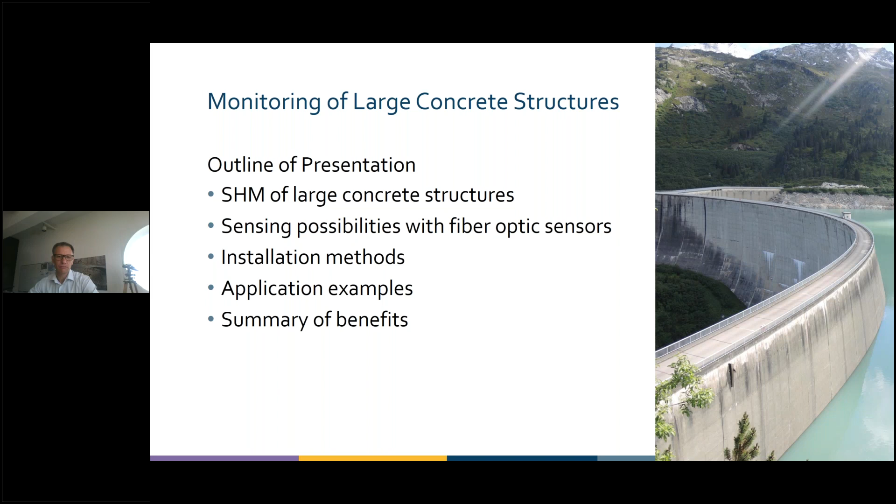So we're going to take a look at sensing possibilities. We're also going to take a look at how you actually install or embed a fiber into a concrete structure, or how you apply a fiber to an existing concrete structure on the surface. We have prepared some application examples for you where you can see the real-world performance of distributed fiber optic sensing for concrete structures. And finally, we're going to take a look at the overall benefits that fiber optic sensing can bring in the monitoring of large concrete structures.

When we take a look first on SHM, structural health monitoring of large concrete structures, this can have various reasons, and this can also stretch over the whole lifetime of a structure. SHM can already start at the design phase of the structure, where you may want to use monitoring to see if your design assumptions are appropriate.

So let's assume you have a high-rise building that needs solid foundations. One question could be, is the design length of your foundation piles appropriate? If the piles are too long, you just wasted money. If the piles are too short, you may not provide stable foundation for your structure.

As soon as the construction starts, SHM can be beneficial to assess the quality of the construction process. So for instance, was the jet grouting procedure performed correctly, or were there some issues with the quality?

However, SHM is not just a passive process. Monitoring data can be directly used to adapt the construction process. Due to the measured deformations, you can change the excavation length in tunnel construction, or you can also control the tensioning step in pre-tensioning of concrete decks.

When the structure is already there, monitoring is useful to detect structural deterioration at an early stage. And here the goal is really to detect it at an early stage, because maintenance work and repair is usually much cheaper at an early stage of a problem than later on.

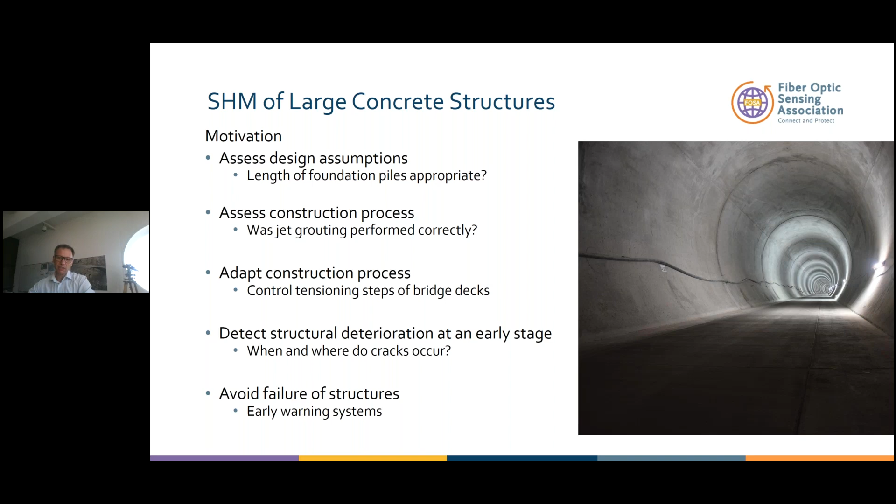First of all, these structures usually have a very long design lifetime, so we're talking about 100 years plus. So everything that you install for monitoring should also work 100 years plus. And can you actually guarantee that?

Secondly, interesting with monitoring of concrete structures is that we do have some areas where we already know problems may occur - usually bearings or joints. However, we also have defects that can occur at any location along the structure. So this means we have on one side focus areas, but on the other side, we also have to monitor the complete structure.

The third topic is that we are currently building exciting new structures that have to be monitored. However, we must not forget about our existing infrastructure. Especially with concrete structures in Central Europe, we have major issues with aging bridges, aging water dams, and aging tunnels. So we need monitoring solutions that can also be applied to existing structures.

And finally, we have harsh environment, and this is also two-folded. On one hand, our structures are usually placed at a remote location within a harsh environment, so all the sensors have to work in that harsh environment. On the other hand, the construction process itself may be harsh, so the sensors also have to be robust enough in order to survive any installation work.

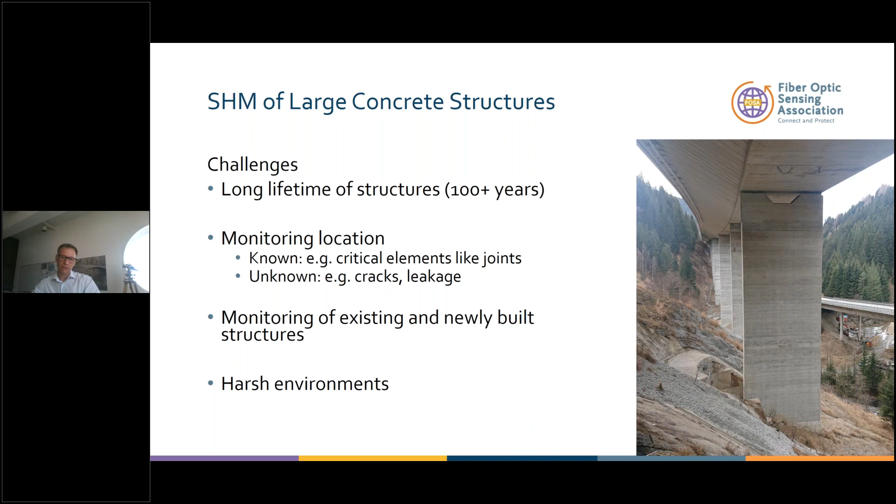Now we're going to take a look on how we can deal with these challenges with distributed fiber optic sensing. I'm pretty sure many of the attendees know about fiber optic sensing, so just a short recap - what is different compared to telecommunication?

In telecommunication, the goal is to transmit data from one end to another end, so basically on one side we have a transmitter, on the other side is the receiver. In sensing, we're actually working with the backscattered signal. And when we're talking about distributed fiber optic sensing, we have a sensing line without any gaps, so we get at any location information of the current status of the fiber.

Depending on the technology being used, it could be a chain of thousands of strain sensors - distributed strain sensing, DSS - thousands of temperature sensors - distributed temperature sensing, DTS - or acoustic sensing, DAS.

One important aspect is we're working with glass fibers, so the core of the fibers is in many cases exactly the same in sensing as it is in telecommunication. However, when we talk about strain sensing, we usually need a different cable.

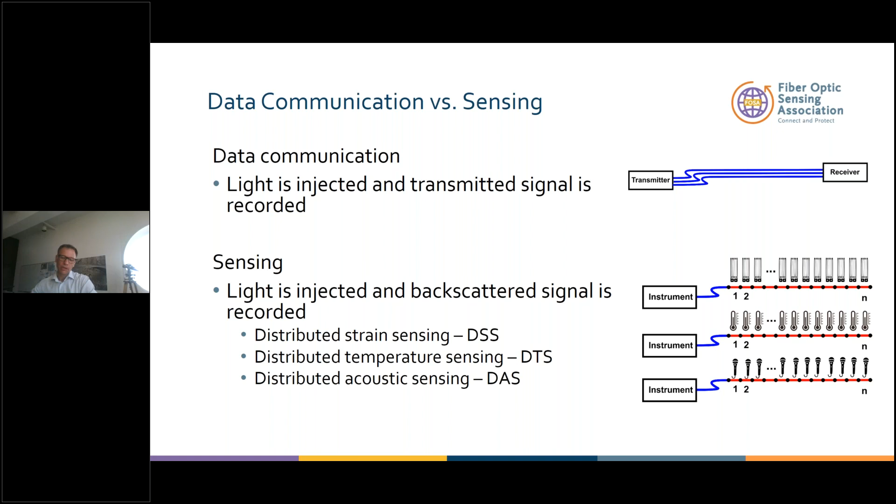Here you see a sketch of the setup of a telecommunication cable and a sensing cable. Within a telecommunication cable, the goal is that the signal is more or less unaffected by everything that happens on the surrounding, and this is usually reached by allowing differential movements. So one setup would be gel-filled tubes where the fiber can slide between the outer surface and the fiber core, allowing differential movement.

On the other hand, when we talk about sensing, we have the completely opposite goal - we want our fiber core to experience everything that happens in the surrounding of the cable. This means you need a totally different cable layout. In this case, the fiber core has to be rigidly connected to all layers of the cable so that any deformation on the surface of the cable is fully transferred to the core of the fiber. Although the fiber may be the same, the setup is different.

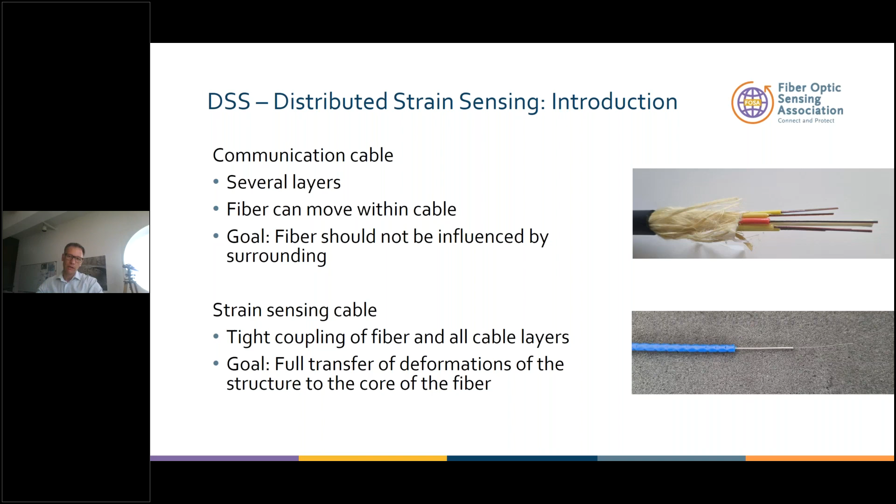Now it depends on the application what is the right cable to be used. It could be a tight buffered cable, where you just have a thicker buffer that is tightly coupled to the cable. When you need more robust cables, it could be a fiber in metal tube, a FiMT - in this case we have a glass fiber that is either along the entire length glued to a metal tube or clamped at certain distances to that metal tube. If it has to be even more robust, you can use special sensing cables which have strengthening members inside and special structures on the surface.

Here the challenge is to find the right optimum - having a robust enough cable to survive the installation, but also, the thicker and more robust the cable is, the less sensitive it is. So you have to select the right cable for your type of application. Regarding ordering that cable, it's like with telecommunication cable - you order the cable on drums, a few hundred meters or kilometers, then cut off the length you need and splice the connectors to the cable, and then you have your final cable that is ready to be installed on site.

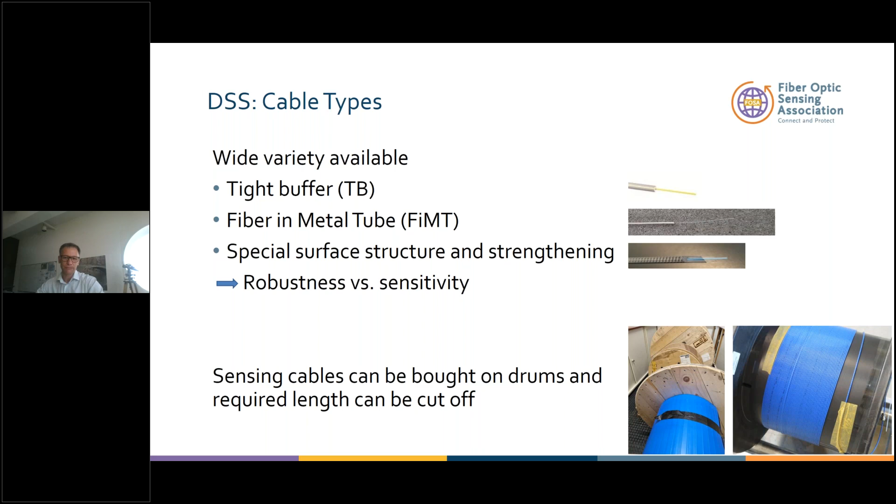When we're interested in vibrations, we use DAS, which basically relies on Rayleigh backscattering. However, high resolution distributed strain sensing also uses Rayleigh backscattering. When we talk about strain sensing over longer distances, usually Brillouin backscattering is used, which shows a shift in the Brillouin frequency depending on temperature and strain.

And the cross dependency already causes an issue. So when we're interested in strain, we also have to take care to capture the temperature, usually done by running two cables in parallel, one optimized for strain, one optimized for temperature. By taking the reading of the temperature cable, we can compensate for the temperature effect on the strain cable. So temperature we always have to take into account, although we may just be interested in strain itself.

However, we could also use Brillouin sensing for temperature sensing if you're just interested in temperature. Another way for temperature sensing is to use the Raman backscattering signal. So really, depending on what your main focus is, instruments measuring Brillouin or Raman backscattering are the right choice.

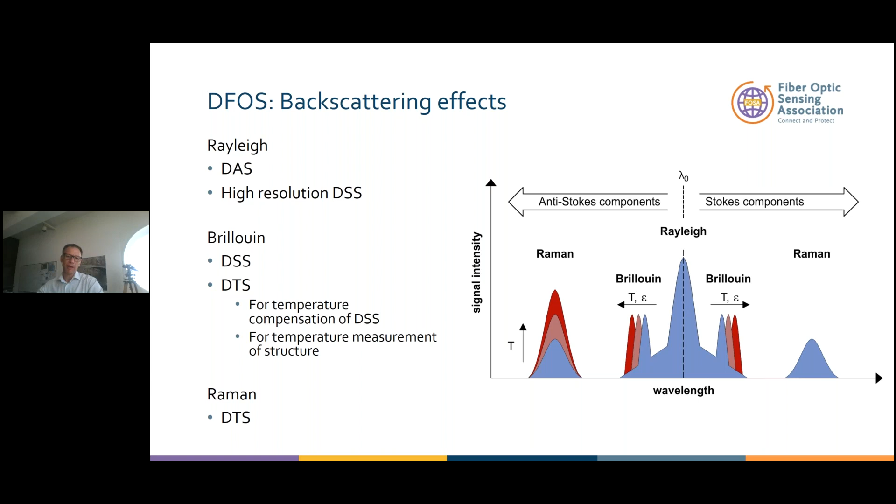Just to give you a bit more idea of what is possible with distributed fiber optic sensing on large concrete structures, we're going to take a look at some application examples. The first one is about pile load testing. This is a usual test which is performed either to assess the right pile length or to assess the right construction method of the pile.

Also important to notice, very often those fibers that are installed mainly for load testing stay within the structure, which means they can also be used for long-term monitoring when we want to see what happens to the foundations of the structure in the long term.

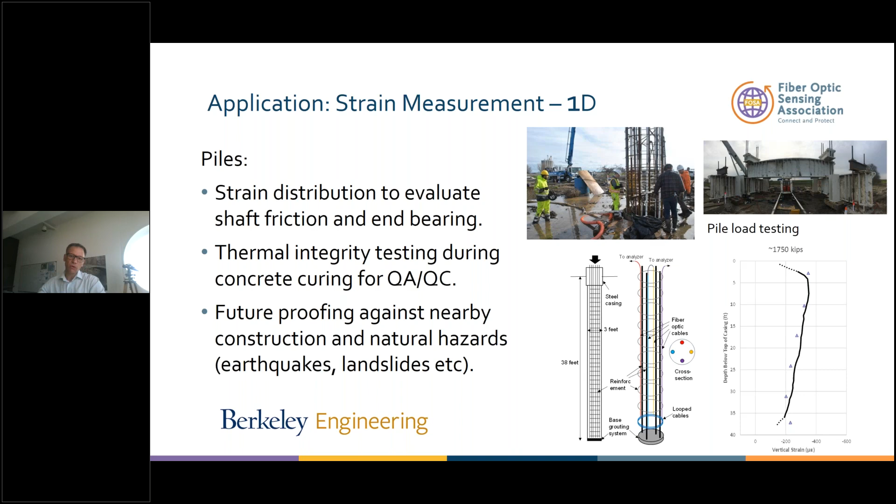So at every location, we get the current curvature, and by double integration, we can also derive the deflection curve of this element. This concept is used in various applications.

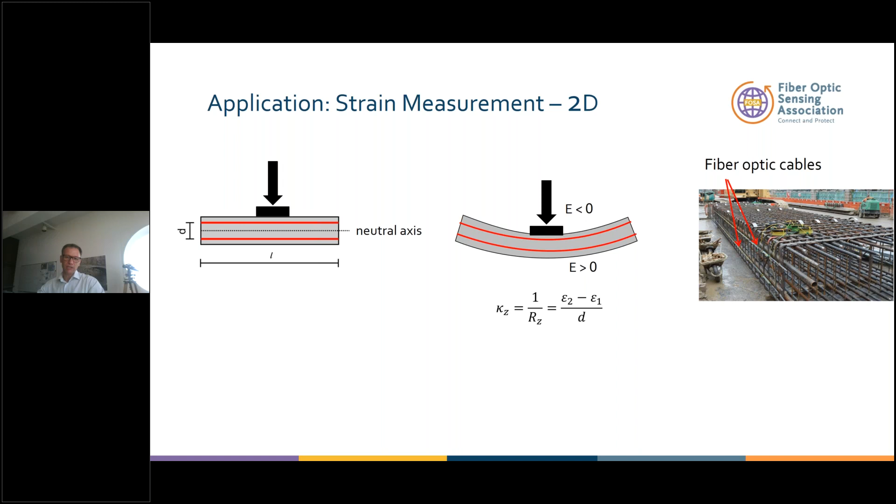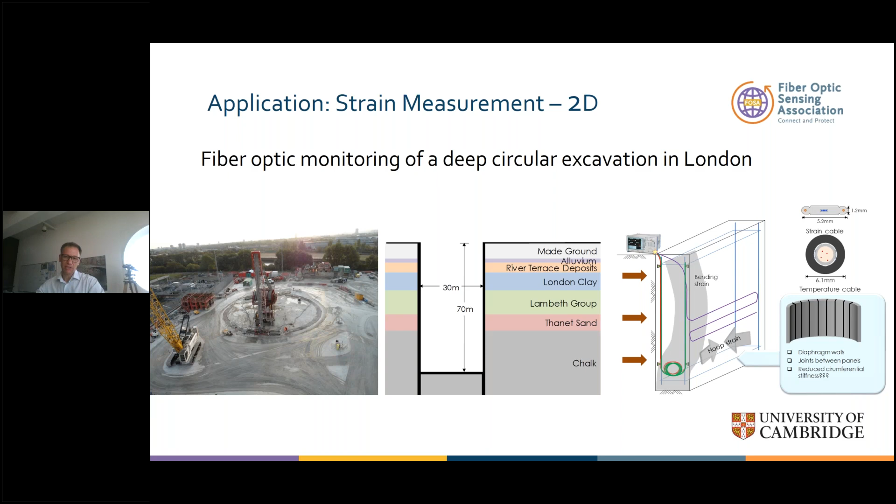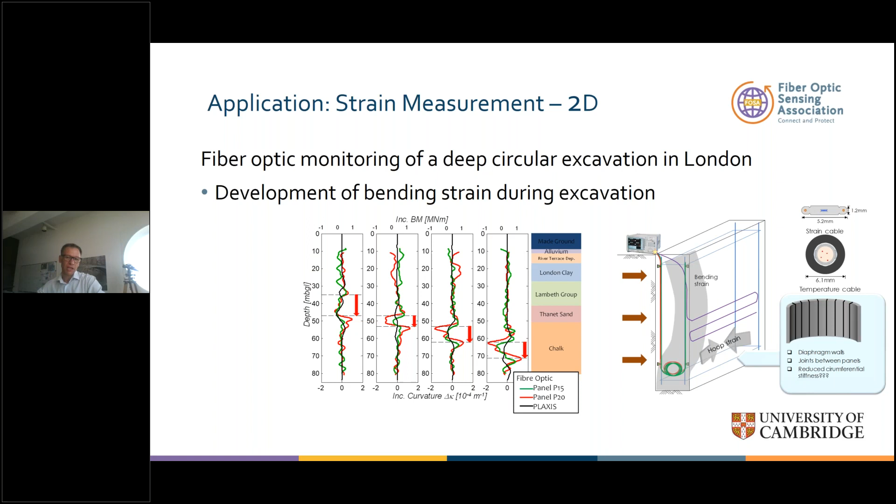When I think about temperature, temperature also indicates curing processes of the concrete. The idea is the thicker the concrete, the longer it takes in curing, meaning you have a peak in temperature which degrades slower than when you have a thinner thickness of the pile. So by just taking the temperature reading or observing the changes of the temperature reading over time, it's possible to predict the thickness of the pile at various depths, and by doing so you can assess the performance quality - how well and how homogeneous that pile was actually produced.

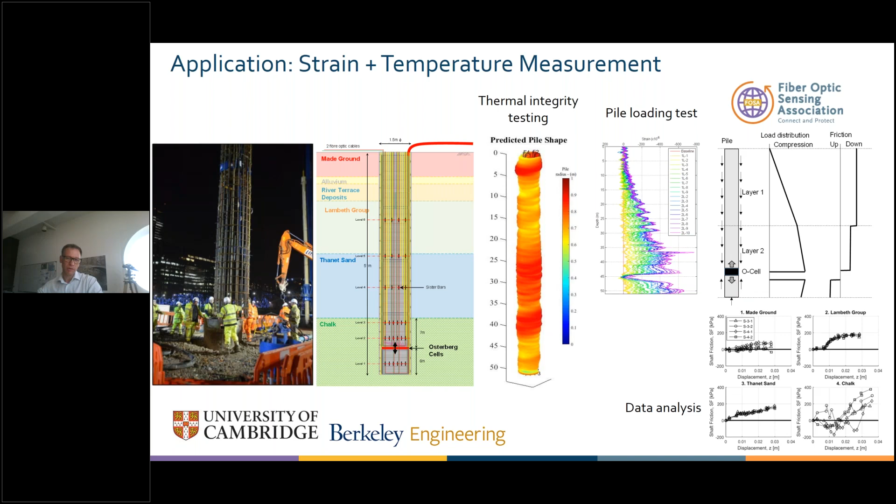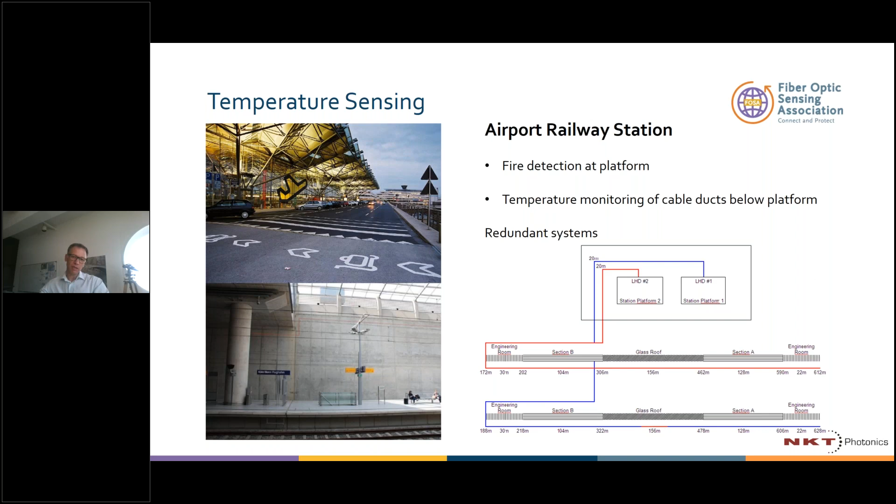In this case, there are different applications. With one sensing line, the engineering room is served, a section with cable ducts, the glass roof, another section, and again a room. So we can, with one single line, observe different areas with different focuses. In the cable ducts, we're taking a look if fire is caused maybe due to some electricity problem of the cables. And here, in order to make it more robust, two cables are guided through, so in case one breaks, we can still measure from the other side or use the other cable.

What you can also see here is the car park, in order to detect fire of cars in the car park.

One could argue fire detection in such locations and also in tunnels is also possible with cameras. Of course, that is true. However, what we do know from tunnel monitoring is that cameras are not really well suited to identify the location of a fire. First of all, they are usually stretched over larger distances, and secondly, as soon as the fire starts, you also have smoke developing, and pretty soon you cannot see anything on the cameras but just smoke. In this case, fiber optic sensing can still identify where the fire location is, and you can steer the fire brigade to the right spot.

So this was now some applications, but actually, how do you get your fiber on or within a concrete structure? There are different options for doing so.

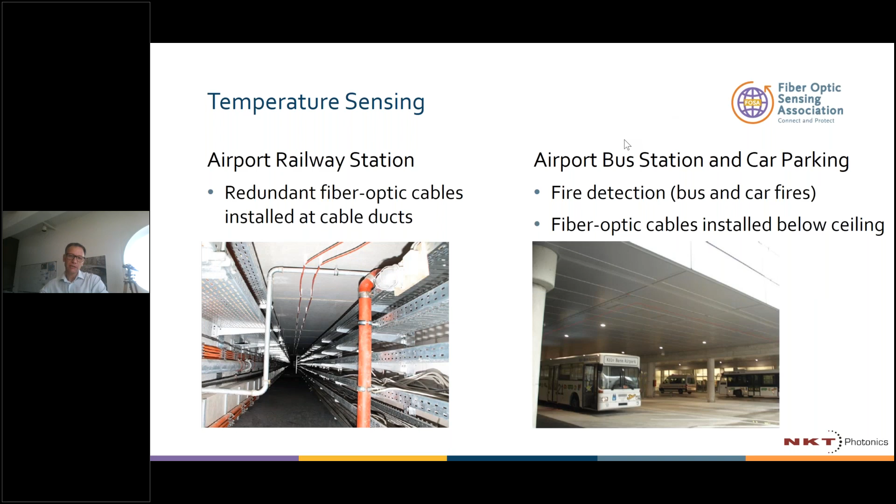We can also mount the cable on top of the rebar. In this case, it's continuously glued to the rebar.

This cable has a similar structure as the rebars, and also with the rebars, the idea is that the concrete interlocks with the rebar, and also in this case with the cable.

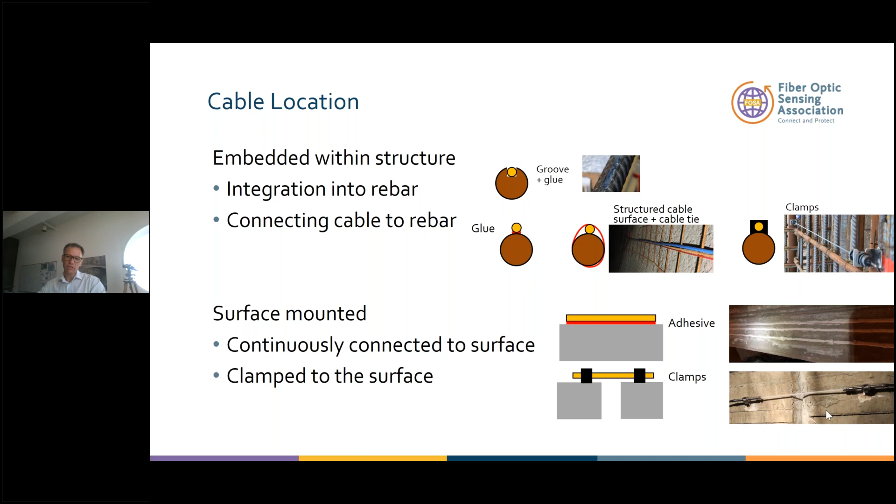We are now going to take a closer look at this second example, where we do see how such an application can look like in real life.

However, nowadays, the power plant is being changed. Instead of just using storage operation, it's being updated for pump storage operation. Pump storage operation means we do have the main reservoir and a second smaller reservoir. So here we store water, and when there's too much energy in the electricity network, we use this extra energy and pump the water back up to the main reservoir.

So although we keep the water dam the way it was, due to the change of the operation, we have a completely different loading cycle. Now it's not just one slow yearly loading cycle. We pump up the water several times per day, and this will also yield a different impact on the structure. The question is now, how does this old aging structure react to the new operation type?

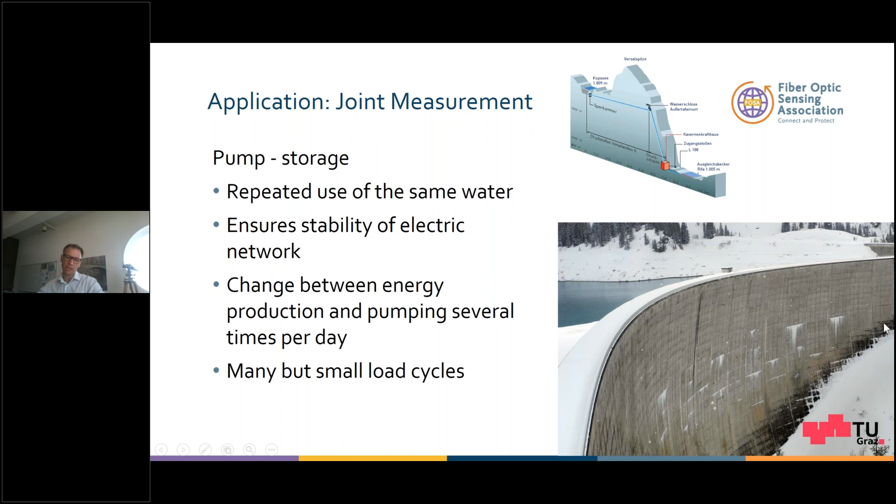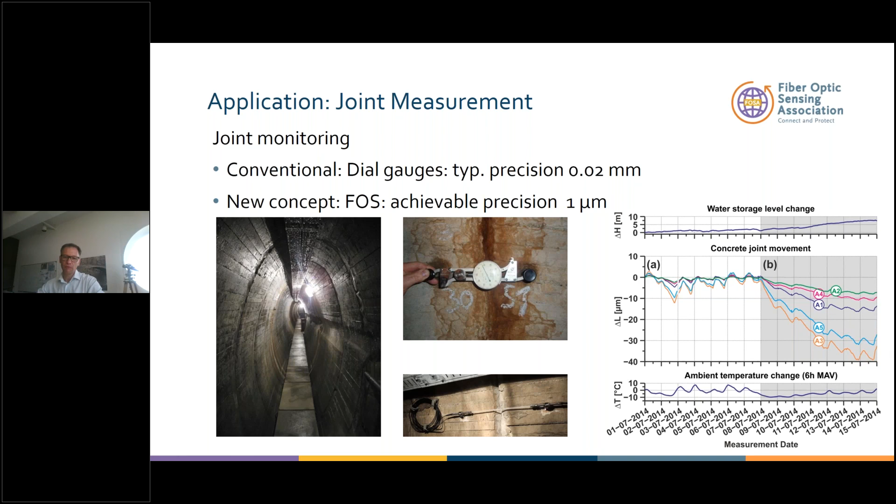As initially said, one important point in concrete monitoring are cracks. So let us take a look now at what a crack is and how a crack looks in a strain signal.

Strain is basically a length change divided by a base length. If we don't have any cracks, if we have an intact structure, we have zero strain along the whole structure. If a crack occurs, we suddenly have a length change, which is the length of the crack. However, we divide it by the initial length, and the initial length is 0. This means theoretically, if we have a crack, we should get a strain reading, a strain peak that goes up to infinity.

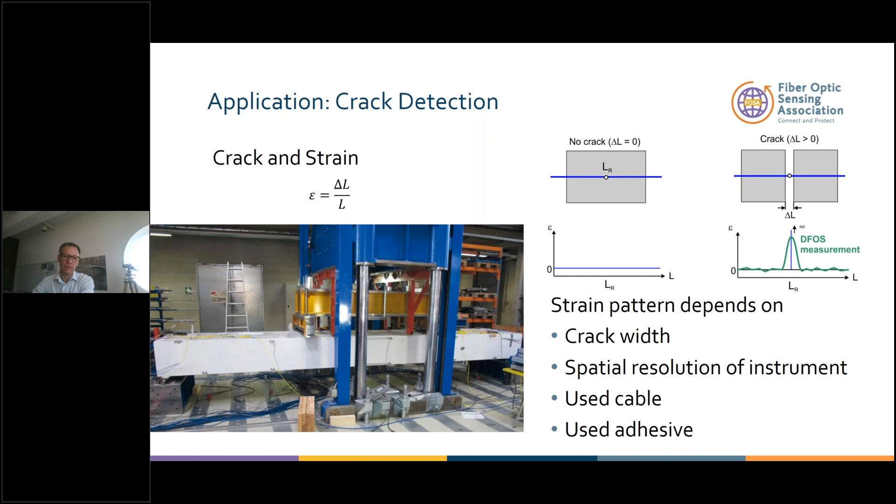But the main point is, by reading the strain signal, we can tell when and where a crack occurs. And I want to show you this on an example, not on a simple straight beam, but on a curved beam. This is actually a tunnel lining segment.

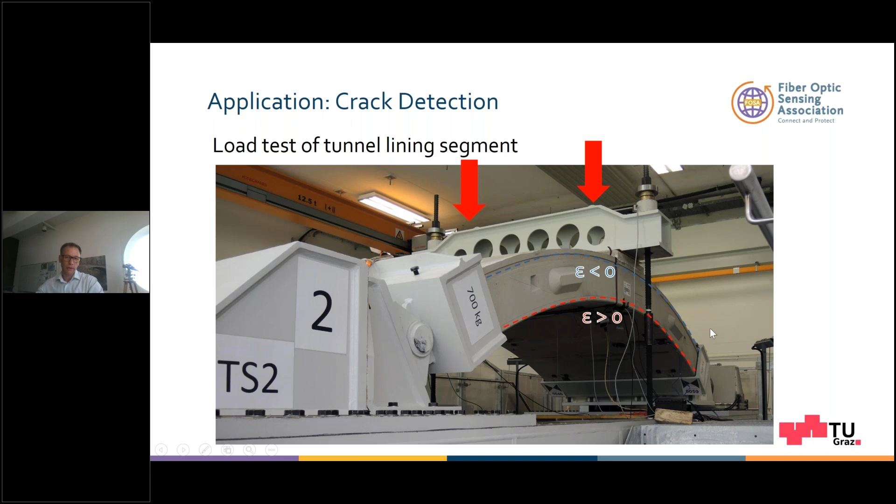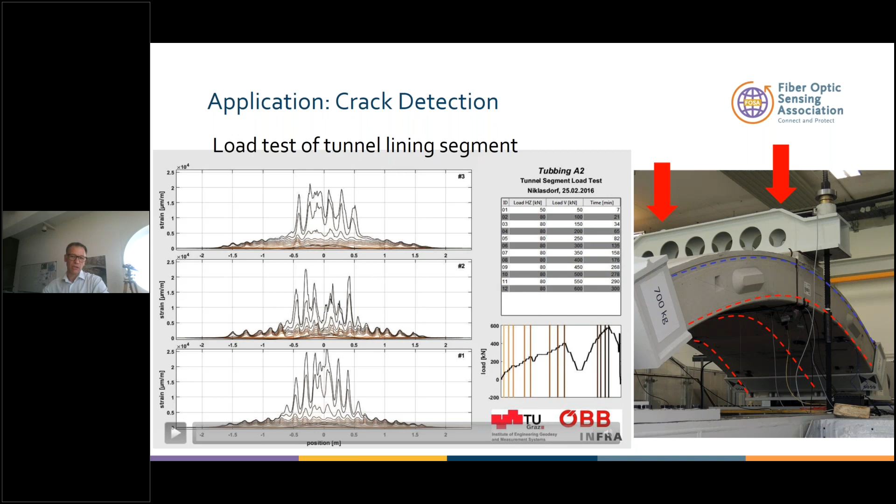And this works not just in load tests, this also works in a real tunnel. So in this case, we see a tunnel boring machine, and this machine places within its shield a ring of segments. Usually it's about 6 to 8 segments, and these segments form a ring.

The nice thing here is that the fibers have already been applied in the factory where the tunnel segments are produced. So after the tunnel boring machine places those elements, the only thing that has to be done is to connect one segment to another and connect them to a communication line.

You can also connect several rings, and with one single instrument you can control several rings. And this instrument can be also in a cross passage or even outside of the tunnel.

What's also nice is you can measure what's happening underneath here. This is an area which is usually very difficult to observe, so you cannot access that with laser scanners or cameras. Fiber optics may be the only way to really measure, in a distributed way, what's happening underneath here.

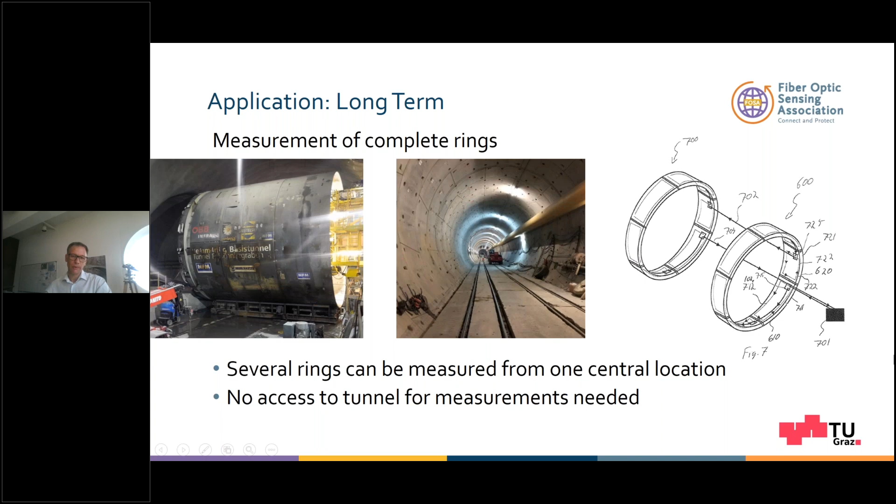Another example just to show how data can be visualized. This is again a tunnel, but for water transport, and in this case 4 fibers were installed. In order to see what's happening, it's also very useful to use waterfall plot diagrams. These are commonly used in distributed acoustic sensing, but can also be a valuable tool to visualize areas which have problems and how problems evolve over time in strain readings.

What we see here is a tunnel in an area prone to earthquakes. We see there was some effect happening, and due to the effect we can see 2 areas which show an increase of strain. On this axis we see time, here we see location along the fiber. This means everything that is blue, nothing is happening in this location. But then we can see this area where strain is increasing, and another second area where we also see strain increasing over time. So we can now take a look at time curves.

We can also send in repair troops and tell them exactly where to look.

So far, you've seen different applications. You've seen that we can take a look at longitudinal strain, we can take a look at bending, we can take a look at joint opening and closing, we can take a look at cracking.

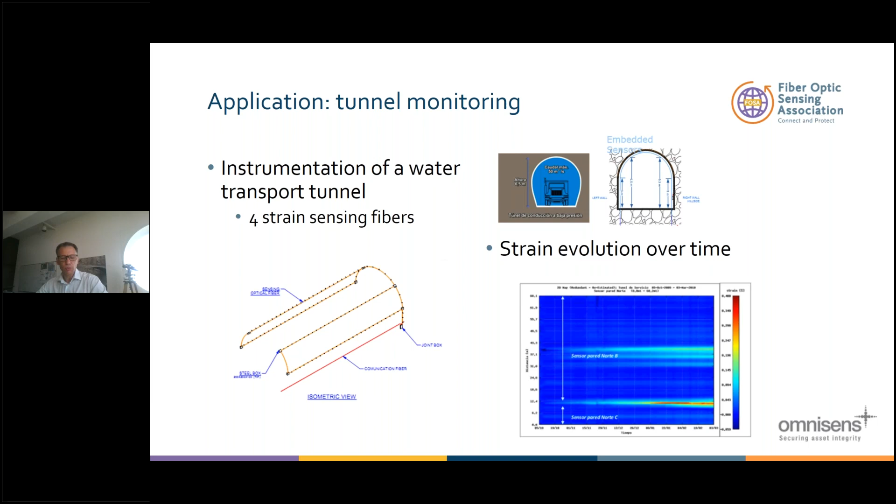But one question that very often arises is, how robust is all of this? First of all, in order to make it work in concrete, the cables have to survive the installation. And a concrete environment can be rather harsh.

One of the harshest environments is shotcreting. Shotcreting means that you have a reinforcement grid, and onto this grid, concrete is sprayed - basically it's more or less shot, not just sprayed, and that's why you have the name shotcrete. The cables that you have applied have to survive this process.

Just to see what shotcreting means, take a look at this video. With high pressure, concrete is being poured directly onto the cables, and the cables have survived that installation.

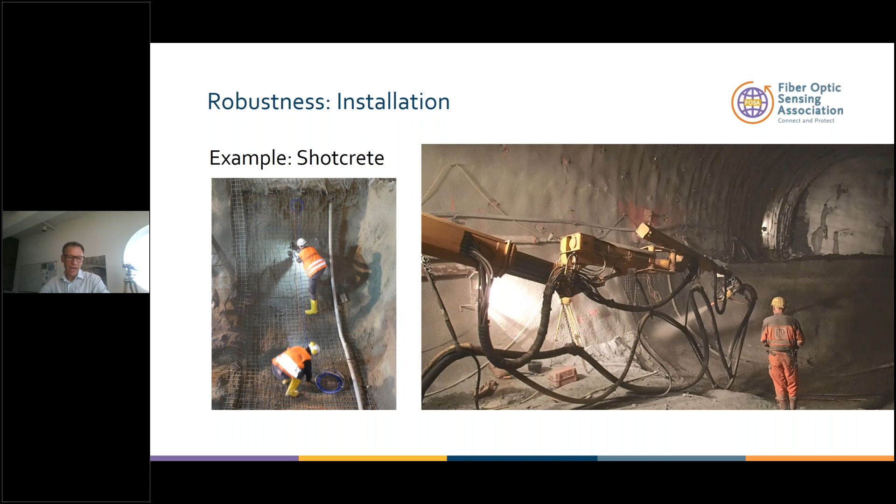When you select the right cable, these processes don't really harm the sensing cables. As I said, we're talking about 100 years plus. The question arises: how do you prove the monitoring system works for 100 years plus when the technology hasn't been around that long? You can apply accelerated aging tests, but personally, I can say it definitely works for several decades. I installed fiber optic cables in this monolithic bridge more than 20 years ago, and these fibers still work.

From a theoretical or conceptual point of view, fiber optic cables are meant for long-term monitoring, because at the sensing location you don't have any electric components, and there are no mechanical moving parts. So typically the error sources of other sensors don't exist for fiber optic sensing cables. Just from the layout, fiber optic sensing is a very good technology for long-term monitoring.

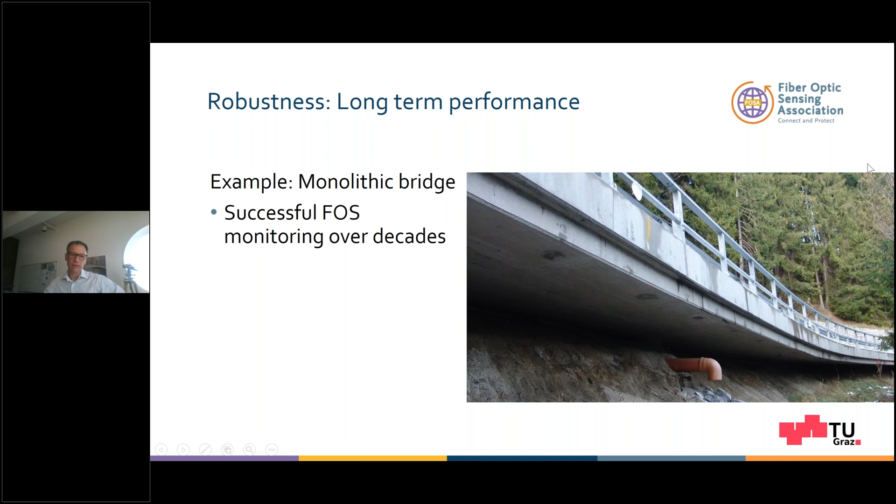What's sometimes forgotten is that it's not just about making a successful installation. There are other crucial things, coming from my own experience. It's really important that you document where you have installed the fibers. In this case, we see the 3D spatial location of fibers installed in a concrete lining.

In this case, there was also a laser scan made, but the important thing is the blue line—this is the routing of the fiber optic cables. It's important that this information is passed on. It has to go into the databases, into the CAD drawings, into the BIM models, and if there's a digital twin, this information has to be in the digital twin as well.

Next, it's not just important that this information is stored virtually somewhere—it has to be visible on site as well. You have to make markings of the cable locations on site. For a successful monitoring project, everyone has to be informed that sensing cables are installed. This sounds obvious, but it means everyone doing any work within the next 100 years—drilling a handrail, drilling whatever—has to be informed that fiber optic sensing cables are there. This can be really challenging.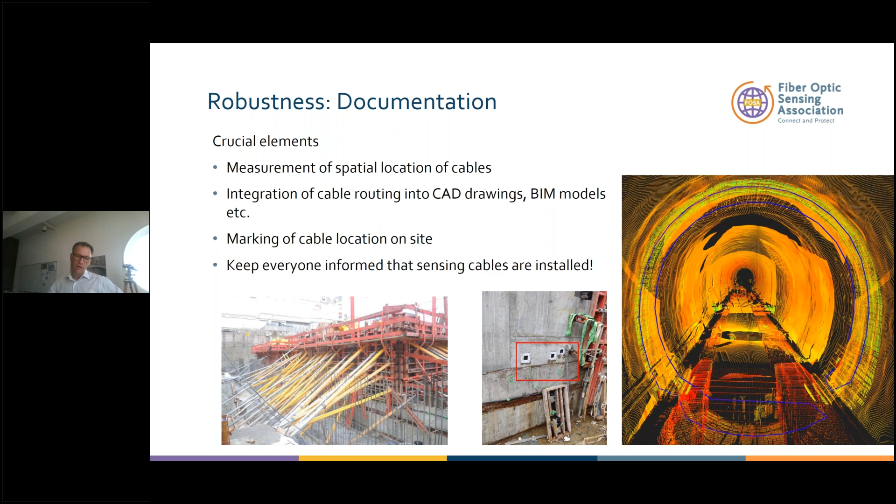Some examples where things didn't work out perfectly: here is the very complex formwork of a bridge construction, where fiber optic sensing cables were installed. Somehow not everyone was well informed enough about where those cables were. When the formwork was removed, you can see the lid of the connection boxes was ripped off, and the connectors were ripped off too. Not such a big problem—splicing new connectors solves the situation—but still something that could have been avoided.

Another situation: here something is being added to a tunnel lining, and you can see the drilling machine. You have to be sure that whoever is drilling is aware there are fiber optic cables, so he's not just making drilling holes there. We have tiny cables, but sometimes, bad luck, people just hit exactly that tiny little cable.

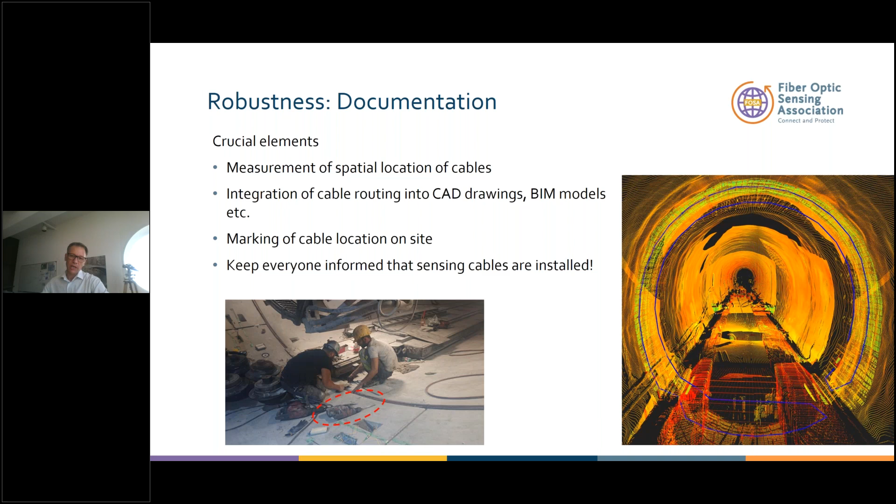If everything is taken into account—selecting the right cable, the right back reflection technologies like Brillouin or Rayleigh, and doing the right documentation—you can really make a long-living permanent monitoring system for a concrete structure. This is a joint application we made with our spin-off company ACI Monitoring.

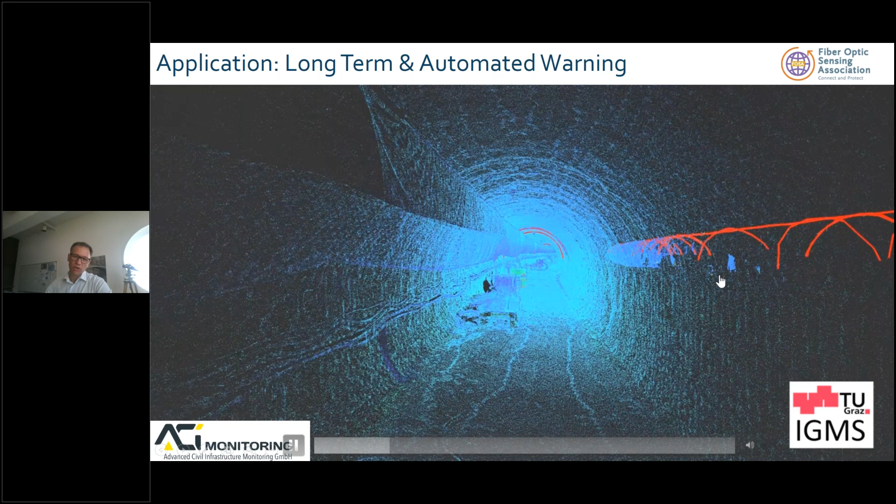Here we have two tunnel lines, and the red lines correspond to the location of the sensing cable. We have it on the ceiling, and also in several cross sections. What's important to notice is that such a monitoring system is also a living thing.

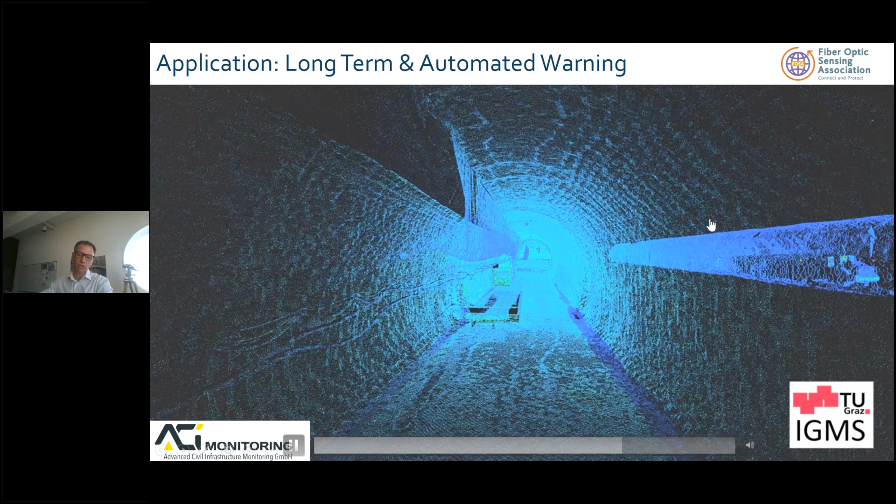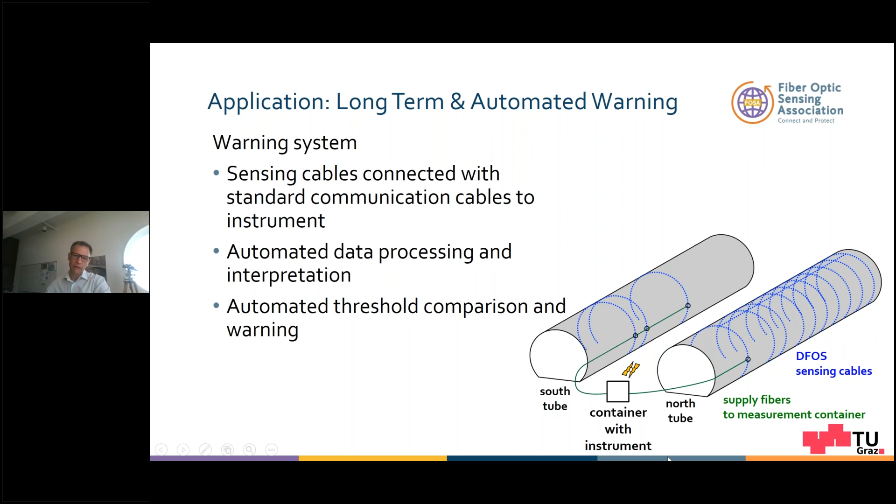At the beginning, you make an installation and may just measure at the location where you installed the fibers. But at a later stage, you can move to cross passages, so you don't have to access the tunnel tubes. The fibers are connected to normal communication fibers, and everything is routed to a central measurement container, currently on top of the construction site, at the tunnel portal. From here, measurements can be made without any interference with tunnel construction.

With other technologies like total station measurements, you're very often just in the way of the construction work with the tripod and instrument. Here we can make measurements not just epoch-wise, but permanently, all the time, without any interference of the tunnel construction. At a later stage, when construction is finished and the tunnel goes into operation, the instrument will move to the operation room of the tunnel building.

During the operation of the tunnel, there's no need to interfere with the traffic. In such a setup, it's also possible to convert it into a fully automatic alarming and warning system with automatic report generation. If threshold values are exceeded, people are informed where to look and what happened there.

I do have some already, and the question asked is the splicing of strain sensing cables identical to the splicing for communications cable? Basically, we use the same fiber in the core, so for the fiber itself the splicing is the identical procedure. You can usually use splicing equipment that is also used for telecommunication. However, the main difference is that you need some practical expertise, because we are dealing with a strain sensing cable where the fiber is basically not meant to be separated from the different cable layers again. So it really needs some training that you're able to remove those different layers without hurting the fiber itself. But after that, it's a normal process, the same as it is with the telecommunication cable.

Another person asked about fiber optic cable installed in a tunnel being used for monitoring - can it be used for communications as well? Basically, the cable itself, or the fiber itself, is the same. However, very often those strain sensing cables don't really have many fibers inside, so if there's just one fiber inside, you can at the same time do either strain sensing or telecommunication. If you have several fiber cores, you have a thicker cable, but then there are also fibers available which have rigid cores for strain sensing and loose cores which are used for temperature sensing. And of course you can also use one of those cores for telecommunication.